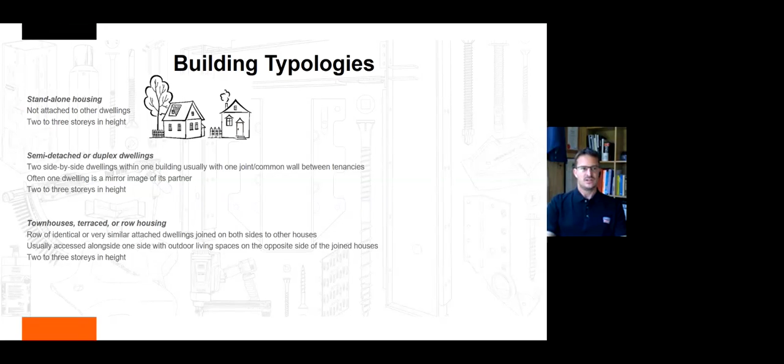So before we get into the technical side, what I wanted to cover off quickly is different building typologies. Standalone housing obviously is fairly familiar to most people and fairly self-explanatory - single detached buildings, typically 2 to 3 stories in height.

The next step from there would be semi-detached and duplex dwellings, which are sort of townhouse type, but with only a couple of buildings side by side, and these are starting to become a little bit more predominant in some of the larger urban areas and subdivisions, similar in height to standalone dwellings. And then, as I said, the townhouses, which is an extension of the duplex buildings, where we've now got a whole lot of these essentially single dwellings, standalone dwellings, but connected by one wall, one to another.

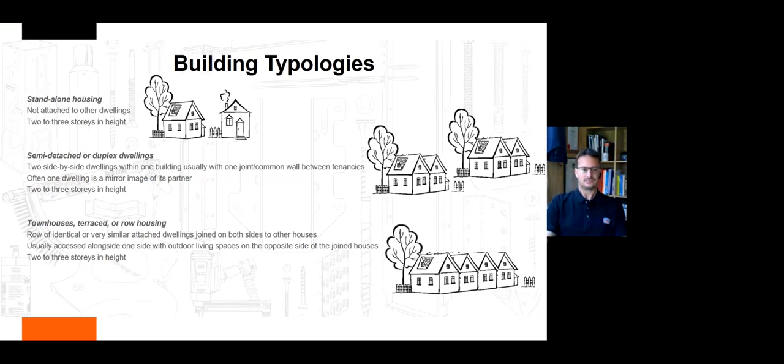From there, it really gets into bigger buildings, so apartments, and the picture's slightly confusing, but the apartments are normally self-contained units, if you want, within a larger building. So these two types of buildings in here, and then we have mid-rise and medium density.

Now, mid-rise and medium density aren't defined in any documentation or regulation that we have in New Zealand, and not very well defined overseas either. Mid-rise typically is accepted as a 3 to 6 to 8 story building in height, whereas medium density isn't necessarily so much about the height, but it's the mix of buildings. So it can be up to 3 stories or around that 3-story mark, but with multiple occupancies across the one building - similar to apartments, but in a much smaller building.

Now, why is all that important? Mid-rise and MDH obviously are starting to gain some traction in New Zealand, or we have for quite a few years now, and so we are starting to see these mixed use buildings, multi-tenancy buildings, and some of those are being built in timber rather than just steel and concrete.

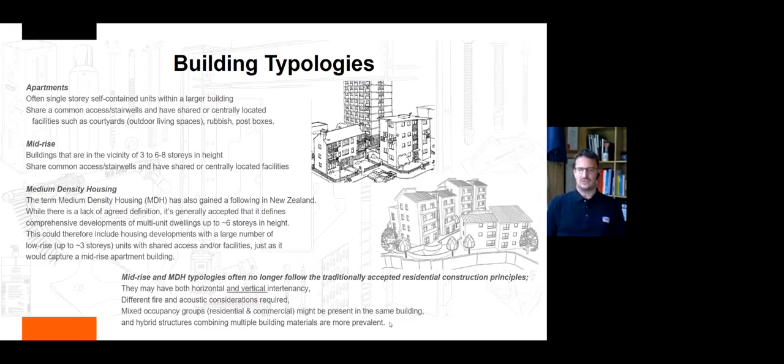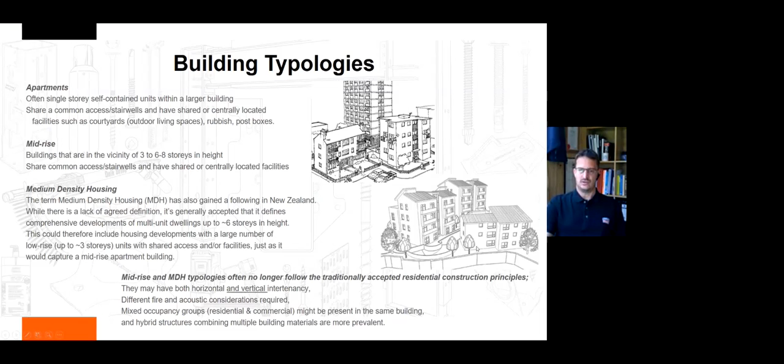Key difference here between mid-rise and MDH, or particularly the MDH, is the vertical intertenancy. So where apartments obviously are generally split floor by floor, MDH quite often has a single tenancy that runs vertically - you might have a unit that extends over 3 stories, and that is one tenancy, whereas in apartments you would normally have each tenancy across the horizontal rather than across the vertical. So you've got horizontal intertenancies, whereas with MDH you've got vertical intertenancies, but the tenancy in the vertical is the same.

So quickly on standards changes, as most of you will be well familiar now, 3603 has been up for review or under review for quite some time now. The intention was to align it more closely with 1720.1, and that has happened. So what we've ended up with is an appendix that modifies 1720.1 as the basis.

At this stage, 3603 is still acceptable to use, and there's a transition period of 1 year. So there's another year before 1720.1, or the NZS AS 1720.1, must be used. Up until then, 3603 can still be used.

3604 is currently under review. Largely corrections - there are some additions and improvements that have been scoped, and I'll talk in a little bit more detail about that in a minute. But this is obviously for standalone dwellings, or the primary focus for 3604 has been standalone dwellings, residential housing, which is now being pushed into multi-storey. And so there was a scoping exercise that was done in 2019, 2020, and that scoping defined what the review of 3604 was going to cover.

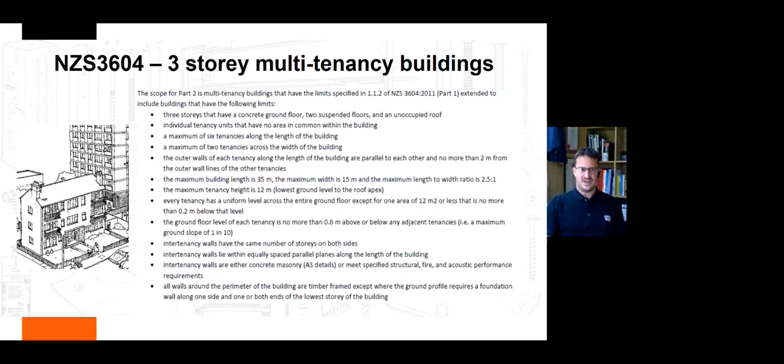Probably not much to talk about in detail. Here, as I said, the information is on the screen in terms of the limitations, but they are quite extensive - there's quite a lot of them.

So 3604 versus 3603 - most of you again will be most familiar with the fact that 3604 is an acceptable solution. Acceptable solutions are by their nature rather prescriptive, and they also have a rather restrictive scope, and that I already highlighted in terms of the 3-storey. So there'd be a whole lot of limitations around where 3604 can be used for multi-residential design, MDH design, and the approach obviously is very prescriptive.

Compare that to 3603, which is the timber engineering design standard, so specific engineering design, and as I've already talked about, 3603 is really out of date, in that it has now been - not replaced, because you've got this overlap transition period - but it's essentially being replaced by NZS AS 1720.1. A big part of that makes sense, because for larger timber buildings, whether it's commercial, industrial, or multi-residential, 3603 doesn't really capture the design methodology that is best practice, or that's used by engineers already, and it doesn't align with current products, particularly for larger timber buildings.

So NZS AS 1720.1 uses 1720.1 as the basis, and then modifies that, so there's a simplified and a detailed design method. The simplified method is essentially 1720.1, and then the detailed design method provides more information, particularly around fasteners, for design of larger timber buildings, and that uses the European Yield Model, the EYM.

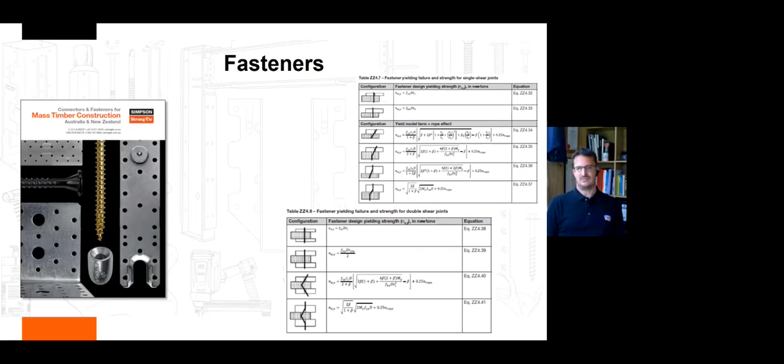You get different failure mechanisms, or potential failure mechanisms, depending on your design parameters, spacings, etc., screw diameters, timber properties, all those sort of things. You get potentially different failure mechanisms, and so you work through calculating or checking each of those failure mechanisms, and obviously the lowest one will be your governing design, and give you the strength for your joint.

Now, what's important here to just highlight too is the fasteners and material properties for those fasteners. Obviously, the fasteners will need different material properties to plug into these calculations to what we've seen in the past in 3603. One of the things that the committee had a look at, and this is a learning from our concrete standard 3101, where there's an inclusion as an actual clause that says the mechanical and chemical anchors used in concrete must have European technical approvals. So that does limit or restrict certain products in the New Zealand market where they aren't supplied out of Europe and therefore haven't got European technical approvals.

This information around material properties for fasteners in the timber standard was quite specifically added as a commentary clause, so that it doesn't exclude screws or suppliers that aren't from Europe, but nonetheless it draws attention to the fact that you need to have these design parameters, and they should really be stated in declarations of performance or European technical approvals. It shows what the different material properties are that you need for fasteners.

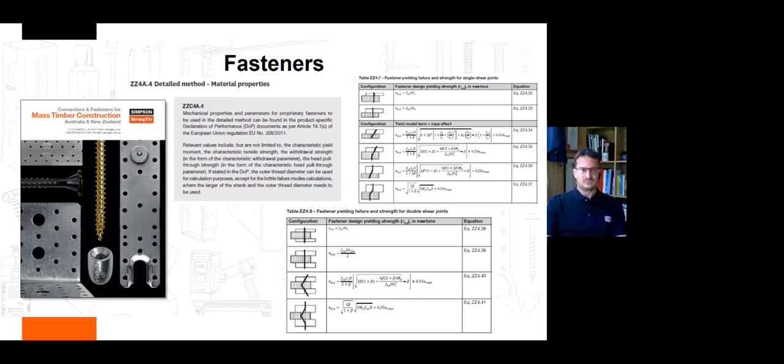So connectors then, as per 3603 or the new NZS AS1720.1, and this is where it gets a little bit more complicated. Fasteners, as I said, are fairly straightforward because we've got the detailed design method or quite prescriptive approaches in terms of 3603, in terms of screw diameters and spacing. When it comes to connectors, it gets a little bit more complicated.

3603 already had a clause in the back, an appendix that talked about AS1649, an Australian standard that looks at testing connectors and coming up with characteristic capacities. There were some minor modifications made in 3603. NZS AS1720.1 now refers directly back to AS1649.

What AS1649 does is look at an LPL, or lower, as it says in brackets, a fifth percentile value of your test data. So you run a number of tests on the same connector. You determine a load capacity from that as a fifth percentile value with 75% confidence. You then have a look at working out your ULL, or unit lateral load, which is as per the two formulas on the screen here. One's a fifth percentile and the other one's an average load.

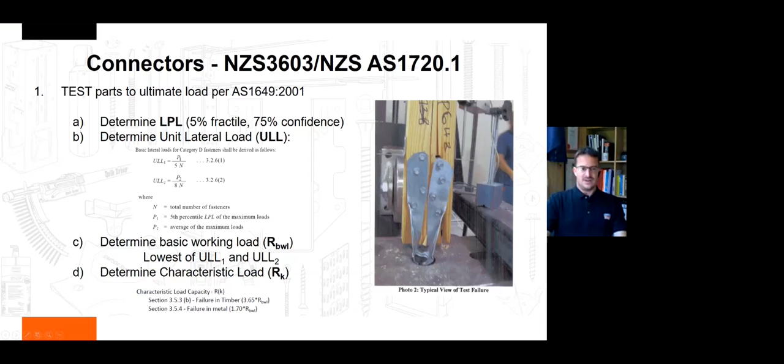So this is the LPL. From that, you take your basic working load, which is the lower of these two numbers you've calculated. Then you look at your failure, whether it's a failure in timber or a failure in metal, and these are two different factors that you use to multiply your basic working load to get a characteristic load.

What we do as Simpson Strong-Tie is then have a second and third look at these test results, or at the capacities we've arrived at. The first one we add is essentially serviceability load, deflection governed. So we take the test results and look at a joint slip limit, typically 3.2 millimeters, unless it's for hold-down connectors where we allow up to 6.4, because those are generally larger connectors than your general connectors, joist hangers, etc., and where joint slip is a little tighter because of the thinner material.

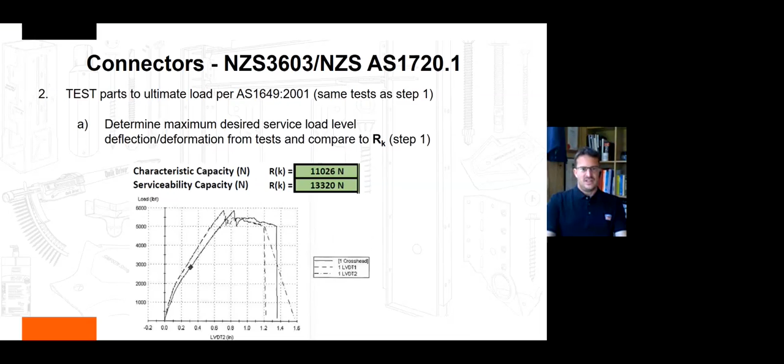So the third part then is theoretical calculation. We run through and calculate the actual capacity of the fastener, so the screws or nails into the timber, and make sure that if that governs, we limit the capacity based on the calculations.

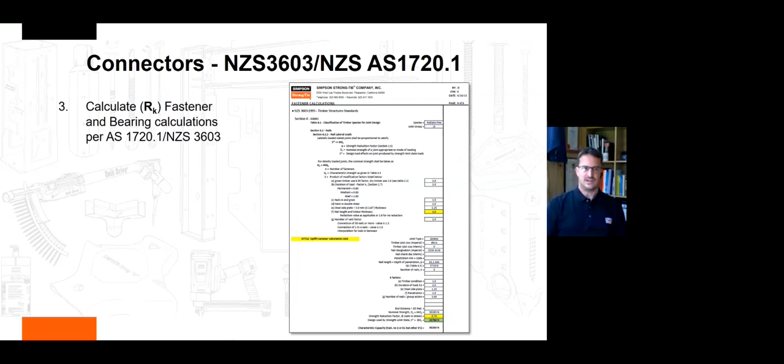So what you get, as I said, is three different results. The first is your AS1649 characteristic capacity. The second is a serviceability aspect, and the third is the actual calculation check run over the top, and the lowest will obviously govern.

So you'll find that for the DTT2, shown in the picture here, we published a capacity of 7.7 kilonewtons. That's the design capacity, so it's already got the phi factor and the load duration factor built into it. We're looking at uplift here, so a load duration factor of 1. So that 11.03 kilonewtons times 0.7 times 1 is 7.7, which is what you find in our literature. That's if you went through and did it as per 3603 or as per 1720.1.

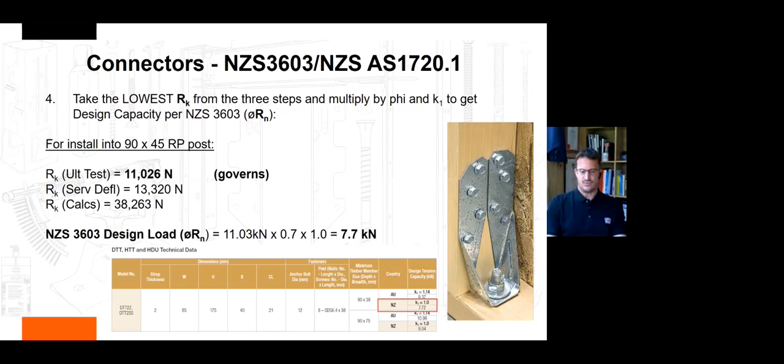If we now have a look at 3604, clause 2.4.7 talks about a connector capacity, and within that it refers to BRANZ EM1. So the actual design capacity here has a characteristic value, and that characteristic value is obtained by testing in accordance with BRANZ evaluation method EM1.

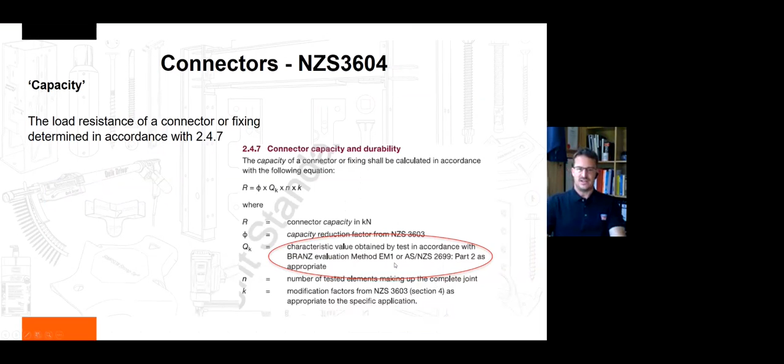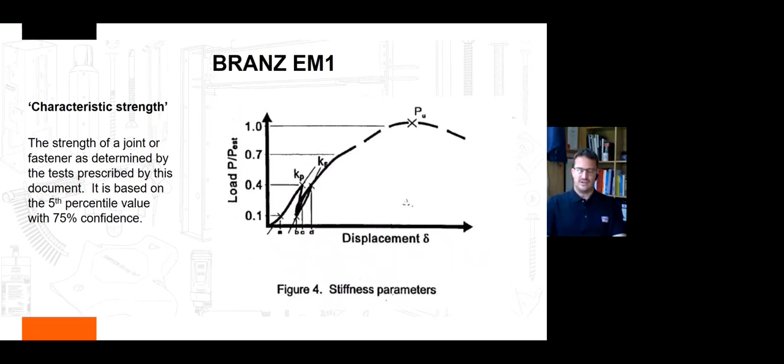So what does EM1 look like? EM1 is essentially our LPL, our initial test data, 5th percentile with 75% confidence. So we take our test results and simply analyze them to come up with a lower probable load, above which we know that 95% of results should sit. And when we take again that DTT2 and analyze that data as simple calculations, we get a characteristic load of 17.3 kilonewtons as BRANZ EM1 calculated.

That, as I said, is very similar to the LPL that we use in AS 1649, but is obviously very different to the characteristic load that we get out of AS 3603 by the time we've applied the other factors to it, the ULL, and applied the design working load reduction factor based on the failure mechanism.

So this LPL is simply test data. The AS 3603 characteristic load, for the numbers that we publish, as Simpson publishes, could also be limited by the joint slip or the theoretical calculations rather than just AS 1649.

That gives you an idea of the difference between the actual characteristic capacities, depending on whether you've calculated them based on AS 3604, i.e. BRANZ EM1, or based on AS 3603, i.e. AS 1649. Hence in our tables, in our 3604 catalogue, we publish a capacity for the DTT2 of 17.3 kilonewtons, which is quite different to 7.7.

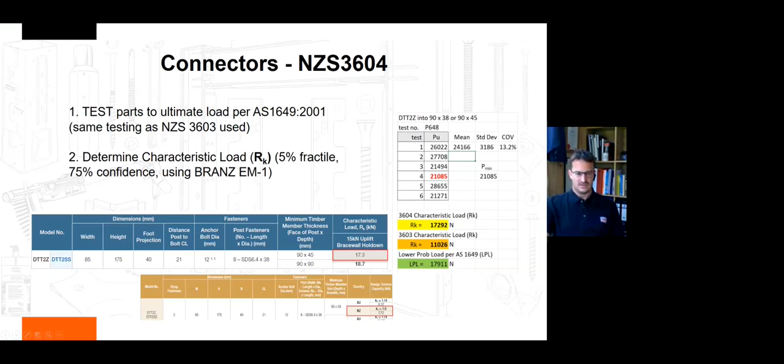Granted this is characteristic, so it still needs the variability factor applied. So what that means is that AS 3604 characteristic capacities aren't equal to AS 3603 characteristic capacities. It's not just the additional joint slip limit or theoretical calculations that Simpson applies over the top, but even just comparing BRANZ EM-1 to AS 1649, you get different characteristic capacities.

Therefore you should really be using specifically developed data that's assessed as per AS 1649 for anything designed to AS 3603 or NZS/AS 1720.1, and information analysed as per BRANZ EM-1 is really only applicable to AS 3604 type structures, so anything within the general scope of building within 3604.

A second note: same sort of thing. If you take the 3604 characteristic capacities, something analysed as per BRANZ EM-1, and you apply your phi and K1 factor, you're not going to get the same result as if you'd done an analysis as per AS 1649.

Particularly for us as Simpson, you won't have the serviceability aspect or the theoretical calculations applied for the capacities that are in our 3604 catalogue.

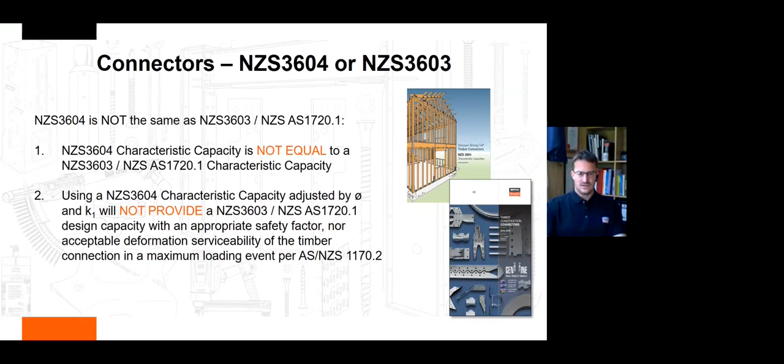So just a quick recap: the numbers that we've calculated, or the capacities that we publish in our 3604 characteristic catalogue, are only applicable to 3604 type buildings.

What are these buildings? This is only a high level summary, but importance level 1 and 2 buildings, currently height of 10 metres, 3 storeys only if it's 2-storey with a part storey in the roof, so not a full 3-storey plus roof, and floor area not exceeding 250 square metres for 3-storey construction.

As we've already said, this is currently under review, and there will be some additional scope for 3-storey which will expand on that slightly, but nonetheless it won't cover a lot of the 3-storey designs that we are seeing being designed and built in timber, concrete or steel at the moment.

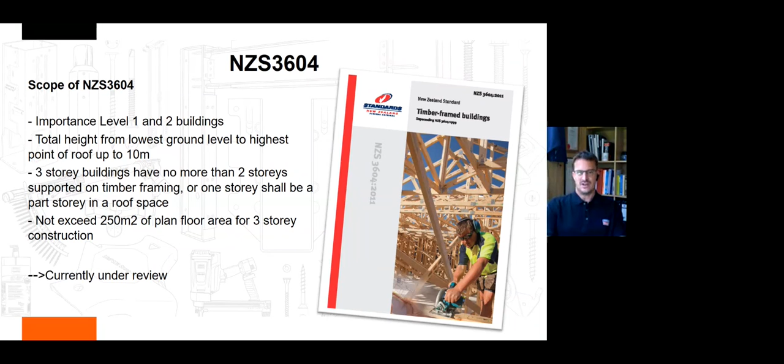So that's the first part of the presentation, focusing on the difference between 3604 and 3603 in terms of determining characteristic capacity and why it's important to use the correct numbers. The next part I want to look at is bracing.

3604 type structures, so light timber frame buildings that we're well familiar with in residential design, obviously use framing, light timber framing with some sort of sheathing on it, whether that's plasterboard, plywood, or any other sheathing that gets fixed to the framing behind it to provide lateral restraint to our buildings.

The elements within that bracing panel are obviously the framing behind it, the sheathing on top, then fasteners that tie the sheathing back to the framing, a compression stud that bears down onto your foundation, and at the other end a hold-down connector to take care of the tensile load in your brace panel, tying it down into the foundation.

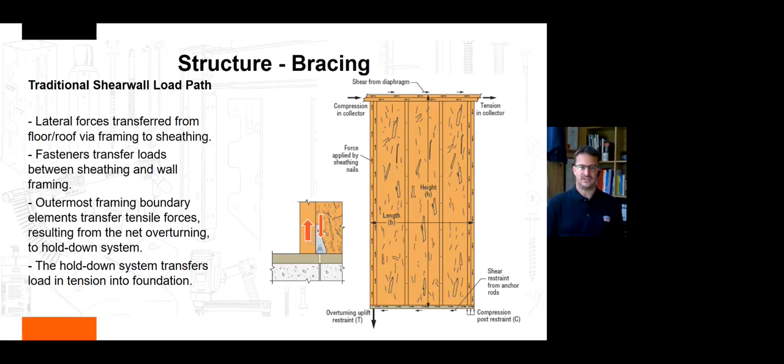Now 3604, similar to what we talked about with the connectors, and a lot of the products in the market that have been traditionally designed as hold-down connectors for these brace panels, don't really give consideration to any stiffness or movement in that panel, but simply look at the actual load capacity, the strength aspect, but not necessarily the stiffness.

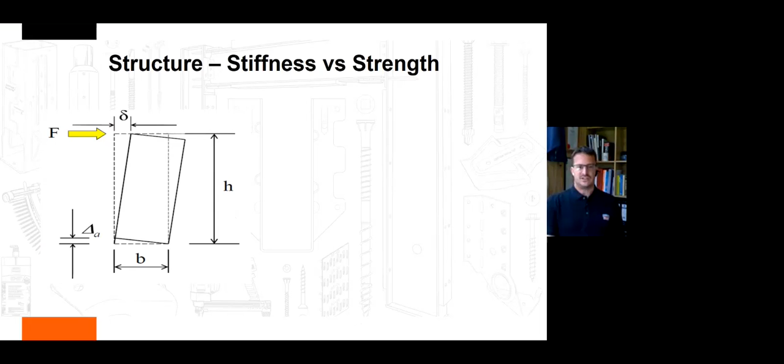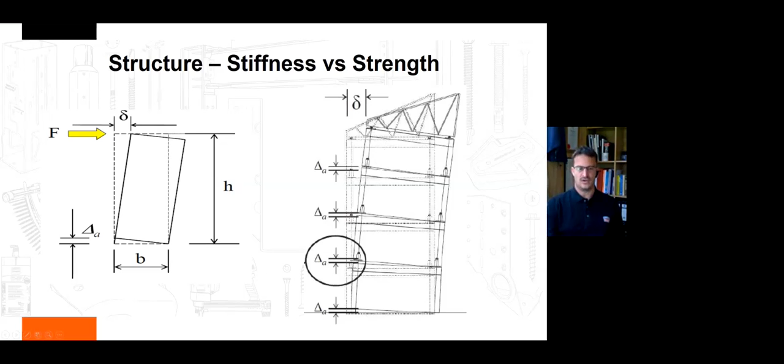When we translate that design method or construction method into multi-storey, we want to be looking at stiffness as well as strength. Multiplying each of these brace panels over several levels, we get a certain amount of movement due to the stiffness of the connector and the panel. We're primarily looking at the connector here, because that's what the talk focuses on. That movement or deflection of the connector on the brace panel has an impact on the rotation of the panel, and in multi-storey design, because you accumulate each of these deflections, you end up with an overall building movement that can be quite considerable. NZS 3604 doesn't really deal with that because it only covers single storey or up to two-storey buildings.

The primary aspects that 3604 looks at when it comes to bracing is distortion of the building, so the stiffness of the panel itself, to make sure we get a building that remains rigid enough and doesn't start to lean over, but that has not a huge impact on the hold down connector. Then we have fixings at the bottom of our building to make sure the entire building doesn't slide along. These aren't necessarily part of the bracing panel, but are hold down bolts and bottom plate fixings that normally tie our building back down onto the foundation to stop it sliding along.

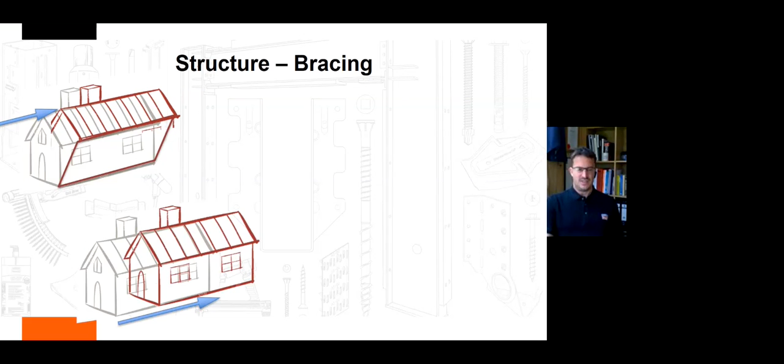Both of these aspects do apply in MDH buildings too, three storey plus, but there are other aspects that come into play when you get into taller buildings, and one of those is overturning of the actual building. What's shown here is a bit extreme, a very tall tower, but nonetheless the overturning needs to be considered. As I've touched on, there are elements of brace panel deformation and movement, the stiffness and flexure of these brace panels at each floor level, that when accumulated over several storeys have quite a different effect on the building than what is acceptable in a 3604 type structure.

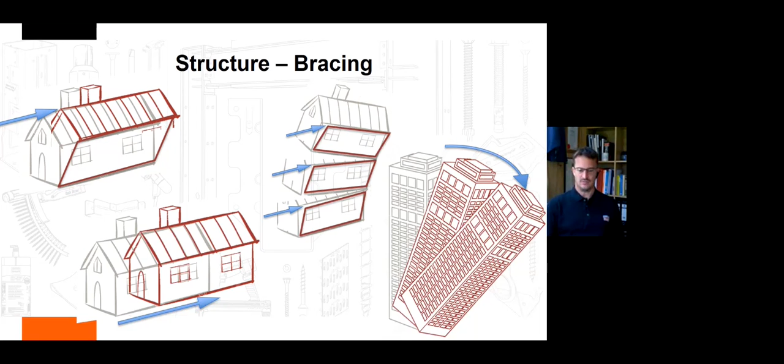So when it comes to MDH or mid-rise, light timber frame is still an option in terms of designing, and I'll talk about the different mass timber and other timber options at the end of the presentation. Light timber frame is a cost-effective solution here. The biggest area we need to consider is stiffness as well as strength.

When it comes to hold down connectors, which you can potentially still use because there are connectors on the market - Simpson has some heavy duty connectors, as do others - you need to look at the actual stiffness of that connector as well as the strength, so that you get your overall building stiffness and flexure design correct.

The other option is to use an anchor tie down system, essentially the same principle as traditional hold down panels, which have been talked about for quite some time in the New Zealand market too. I talked about anchor tie down systems about three years ago at a TDS roadshow in greater detail, but the concept in terms of the brace panel remains the same.

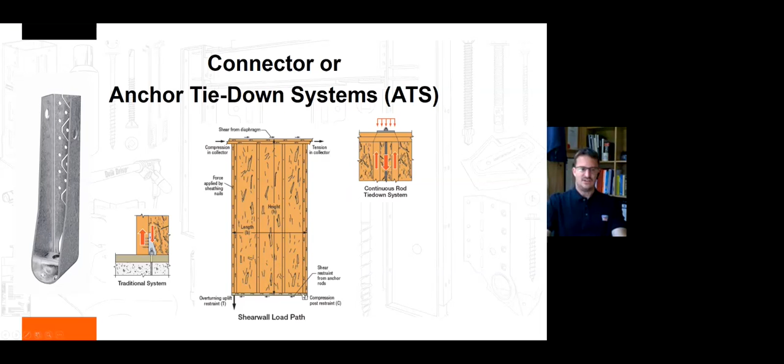You've got light timber framing, with sheathing across the top that has fasteners to tie the sheathing back into your wall framing. You still have a compression end of your panel and a tension end, but instead of having this hold down connector that sits in the bottom corner of the brace panel, we now run a rod up the length of the panel and provide a tie off at the top plate level.

So you've got a steel rod that runs up your brace panel until it gets to the top plate level, where you've then got a washer and a take-up device, or tie off, to grab the top of the panel. As that panel wants to lift up, it pushes against the framing, pushes against the bearing plate, which pushes against the nut or take-up device, and stops that panel from rotating up, transferring that load into tension.

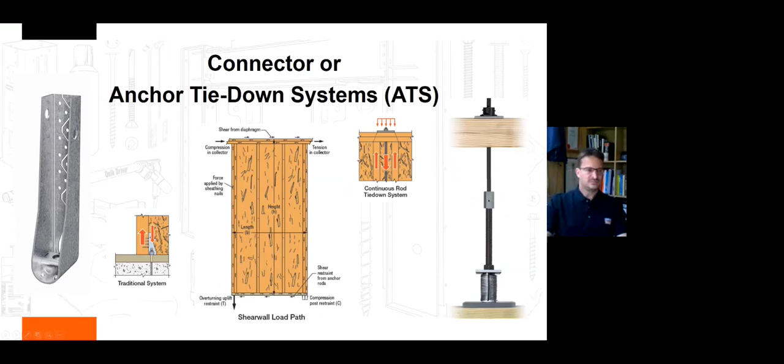That rod is connected into our foundation to pick up the tensile load. If we do that over multiple levels, the steel rod runs continuous over each of these levels. Going back to the previous picture, you'll see we've got these couplers. So while we talk about a continuous rod, obviously it isn't full length over multiple stories, but these couplers allow you to join one rod to another, and potentially a larger rod to a smaller rod. Over several stories, we have this continuous steel rod running up, and at each floor level, at each top plate level, we'd tie off to provide the tensile or tension hold down for that brace panel below it.

In reality, because it's quite hard to get take-up devices and the tie-off happening at top plate level, since that sits within the mid-floor, we actually do it at bottom plate level of the next story up. This is where people get confused, because you've now got a tie-off at bottom plate level here, but it's not for this brace panel below it. So it's not like our traditional hold down connector, just because it sits at bottom plate level, that it's for this panel. The tie-off is actually for the brace panel below it. Your next level would have a tie-off at the bottom plate level of the next story up, and once you get to the top of the building, you have a tie-off at the actual top plate level.

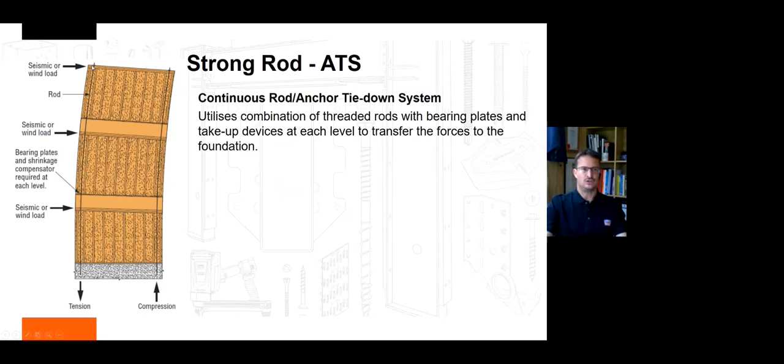As far as the design is concerned, the method is exactly the same. Your tensile load comes down through the steel rod, and you've got studs that act as your compression stud pack. What's important here is that the lever arm between tension and compression changes, because as you go down the building, your loads accumulate, giving larger tensile and compressive loads. So you end up with a reasonable number of studs to transfer your compression load, and the center of your stud pack provides the distance to the center of your rod, as far as the lever arm between tension and compression is concerned. So be careful when designing these that your compression isn't measured to the center of the rod, it's the center of your stud pack.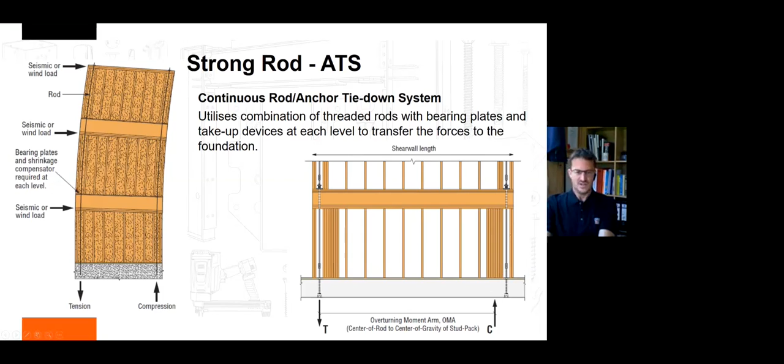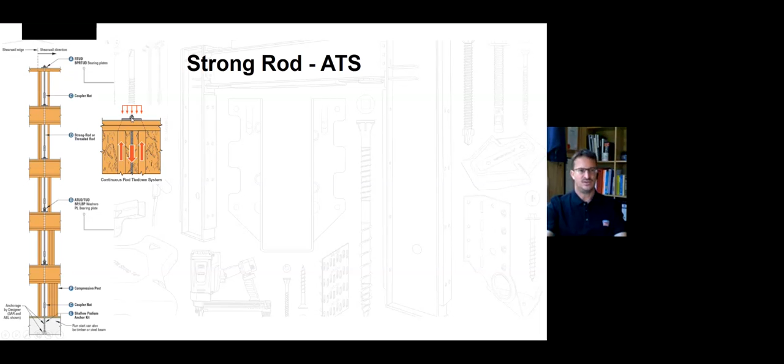So when it comes to tie-off, you've got this continuous rod running up the building. In theory, we're tying off at top plate level, but in reality, we're tying off at the bottom plate level of the next level up, because it's a lot easier to get the components in there. If we put a bearing plate or washer with a nut over the top, as the building settles and we get shrinkage over each level -- particularly towards the top, because you get accumulation of shrinkage from each level, so the top of the building settles a lot more than the bottom -- we'd end up with a gap developing between the nut and the bearing plate. So there are take-up devices we put in to deal with that settlement.

We have two different take-up devices. One is a ratcheting take-up device. This is a cut nut insert, a threaded insert in four sections with a spring around the outside, that grabs the rod as it comes through. It has little lugs screwed through our bearing plate, because the load pushes up against the bearing plate, pushing up against the take-up device, which then grabs the rod. This holds tight against the rod so it can't pull through in the downward direction, allowing it to pick up the tensile load, but it can still push through in the upward direction.

The spring around the outside allows the threads on the rod to click through in an upwards direction, so that as the building settles and the framing moves downwards, the device, held screwed to the top plate, simply ratchets along, allowing the rod to travel upwards. Any shrinkage that happens is removed because the device ratchets down along the rod.

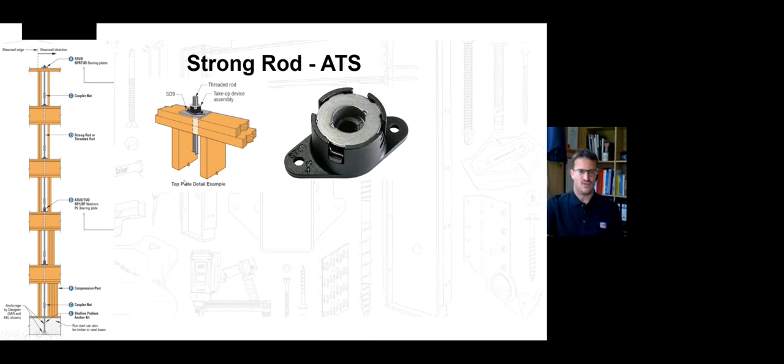Now, the other take-up device that we have, and the one we suggest people use in the lower stories due to its failure mechanism, is what I call the screw jack type device.

These are two tubes. This one's turned upside down because it's a little easier to see, but it's the same device, just looking at the bottom. You can see an inner tube and an outer tube. The outer tube has a thread on the inside, the inner tube has a thread on the outside, and you've got a spring around the outside, which is a torsional spring.

When you pull this activation pin out, that allows the spring to unwind the inner tube from the outer tube. As it unwinds, because of the threads, it extends and fills the gap. So quite different to the ratcheting take-up devices, and you now have a bearing plate with a washer over the top, with this take-up device between it.

Once you pull the pin out, if the building settles, the framing moves down, and the torsional spring wound around the device would cause that device to unscrew.

The failure mechanism of these is quite different because you've got the rod running through the middle of it. The rod's in tension, the actual device is in compression because it sits between the bearing plate and the washer over the top. But because the rod runs through the middle in tension, that restrains it so it can't buckle, and you've got much coarser threads on here.

So the failure mechanism of these is much more ductile, whereas the failure mechanism in your ratcheting take-up devices is a lot more brittle or instantaneous, because once you've damaged the threads, you're going to lose your load carrying ability altogether. Whereas this is going to take a lot more to deform those threads.

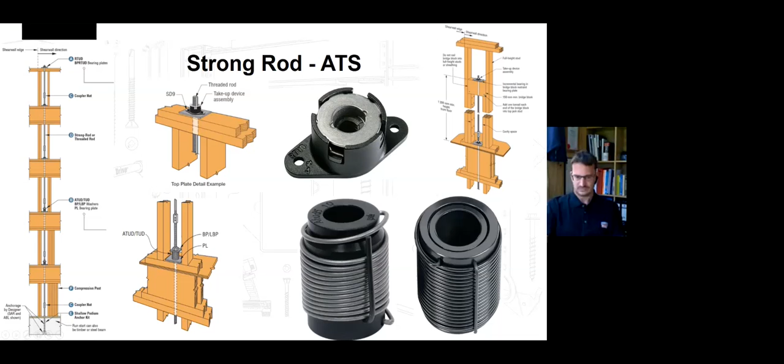Now there's a little video here that's available on YouTube too, and I'll play that quickly. This is from a test that was done in 2009 with the strong rod system in Japan on a shake table.

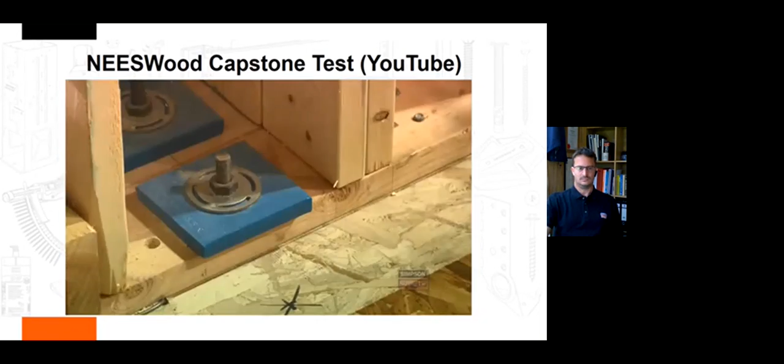I'll stop it here, sorry, because the video seems to have a little bit of a twitch on it.

But as I said, the video is available on YouTube—search for NEESWood, and you'll find it there too. This was done in 2009, as I said at the start, so this isn't really new technology. Globally, the anchor tie-down systems have been used quite widely, and we have a much better understanding of the design principles behind it, and we've refined the system from what it was back in 2009. So this isn't really new—it is a reasonably new addition to New Zealand, but it does enable light timber frame to be used in these multi-storey buildings. Overseas it's not just 3 to 6 storeys, but up to 8 storeys, where we're seeing these anchor tie-down systems.

That leads me on to the next thing, which is really the effective use of timber. So obviously this is for light timber frame, which uses stress graded structural timber, exactly the same as what we do in 3604.

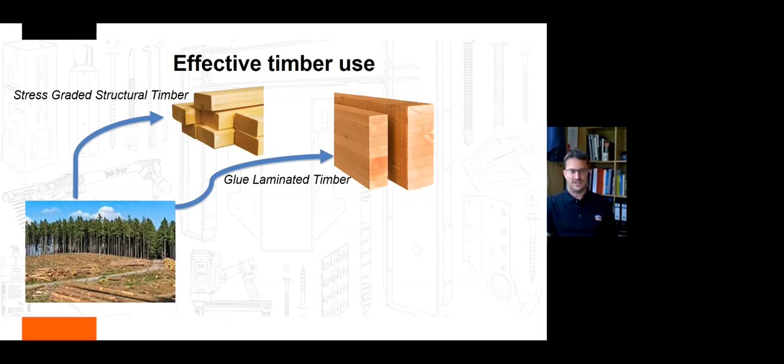We can turn timber into other materials, as I'm pretty sure most of you are well familiar with. There's glue laminated timber, cross laminated timber, and laminated veneer lumber, among a few others, but those are the primary structural timber materials readily available in the New Zealand market.

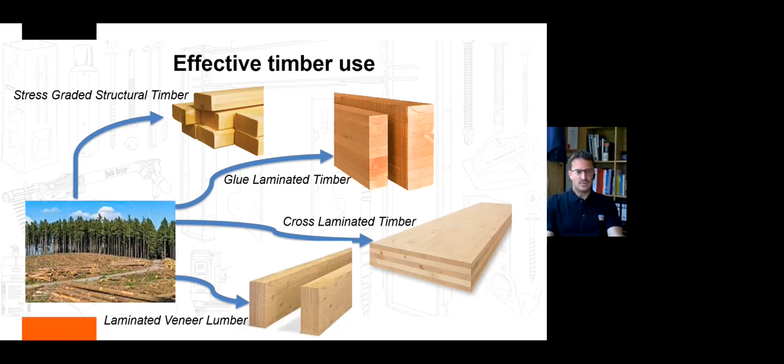So why do I want to talk about that? Well, those different materials, as you go from stress graded, to glue lam, cross lam, and LVL, end up with much greater strength and stiffness in that panel. Some of the strength is a natural byproduct of the randomizing of defects, while the stiffness is an impact of the actual engineering that goes into it.

As we go from sawn timber that's stress graded, to glue lam, then onto CLT and LVL, there's much greater processing required at each step, because we're separating the timber fibre a lot more and then reconstituting it to give us the material properties and sizes that we want. And that's where the stiffness really comes from.

Because we can select different veneers when it comes to glue lam, cross laminated timber, and laminated veneer lumber, we can impact the stiffness. The strength is almost a byproduct of the randomizing of defects, which has a large impact on strength. As we go through those materials, the material properties also become a lot more consistent.

The spread of material properties becomes a lot more consistent, so you get much more uniform performance out of LVL because it's selective veneers glued together, similar with CLT and glue lam.

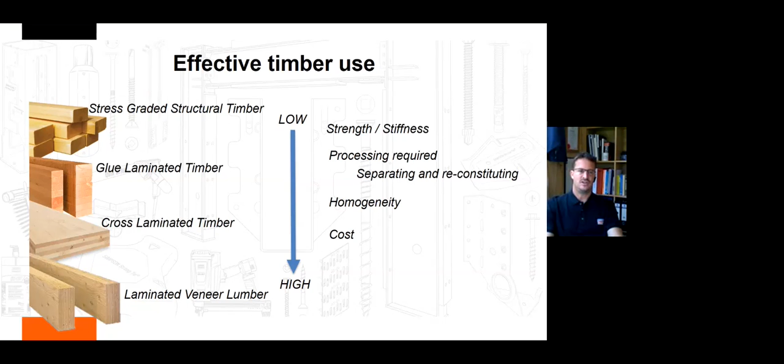The downside of that is cost. Light timber frame, if we take a stick of timber, is much cheaper because there's less processing that goes into it than the cost of CLT or LVL. But there are limitations when it comes to light timber frame and the material properties.

I wanted to throw this in because I think it's important for us as engineers to remember what the benefits really are of different materials, and using them effectively so that the end user, whether the actual occupier or the developer, gets best bang for buck with their timber building. That's the only way we're going to encourage much greater uptake of timber in these mid-rise buildings than the steel or concrete we're currently seeing.

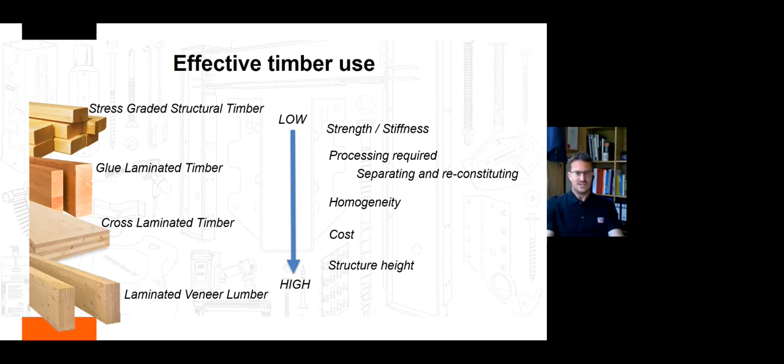Skipping through a couple of quick examples of buildings that have been built: Stonefields in Auckland has a couple of big blocks, 3-storey, that were one of the first buildings in New Zealand with the rod system in it, going back quite a few years now.

Mary Potter has been talked about quite a bit over the past years. Again, this was designed with a Simpson Strong-Rod anchor tie-down system, and there's been plenty of talk around that. Now we're seeing a bit more evolution of this, and Kāinga Ora is a good example of using the right material in the right applications.

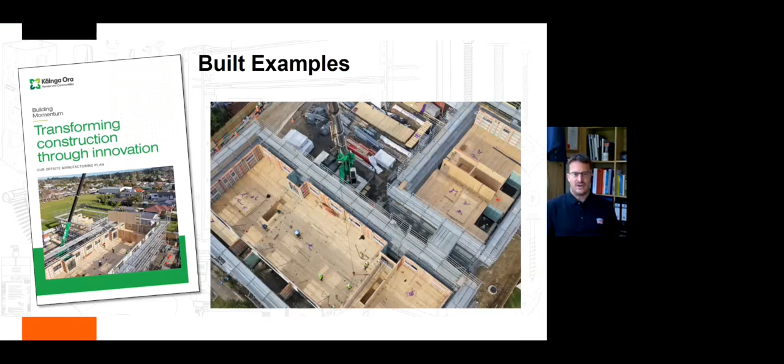This is CLT - we've done a few designs now with engineers using our system where they've used CLT for the stairwells and CLT floors, then used light timber frame with the anchor tie-down system for bracing on each floor level. Even the system itself has had a little bit of refinement by the engineers that have used it.

This is a couple of pictures from the Kāinga Ora project, but we do, as in Simpson, provide cast-in anchors or threaded rods with washers attached to them that get cast into the concrete.

The difficulty, and this was one of the learnings from the early Stonefields project, was that this rod really needs to be perfectly placed, because it ends up sitting between studs and a wall plate. The bearing plate that sits over the top of it at the next level up has to fit between the two studs. So in this orientation, the rod needs to be fairly accurate, and out of plane it also needs to be fairly accurate, because if the bearing plate sits over the top and that rod isn't centered, the bearing plate would either clash with the interior lining or the exterior wall cladding. So placement of these cast-in anchors is quite critical.

To avoid potential issues when they aren't exactly right, a common detail now is to have a steel plate with steel attached to the bottom that gets cast into the concrete, and to that steel plate we weld a steel starter block. These starter blocks normally allow you to connect a rod to steel beams. The starter block gets welded onto the cast-in plate, which is a lot easier to get exactly right, because at that stage the concrete's done, we know where the edges are, and we can measure out exactly where that steel block goes, so the rod sits nice and centered in both orientations.

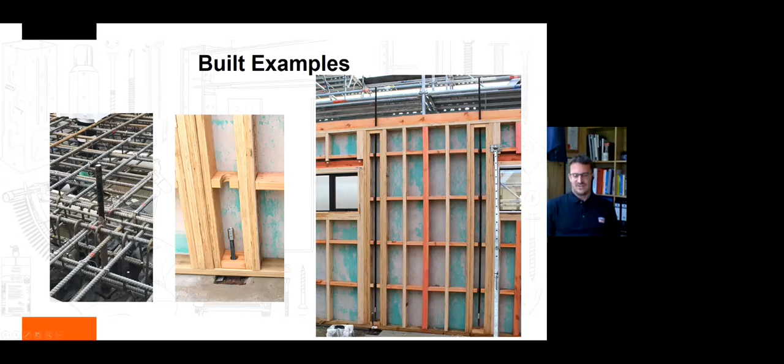So why wood? We've talked a fair bit about 3604 and 3603 in this presentation. Timber has a lot of benefits in terms of sustainability and in terms of what we're used to for residential construction, our level 1 building importance, level 1 and 2 buildings. We're seeing an interest in progressing that into multi-storey design, both in terms of the update to 3604, but also developers, engineers, and end users wanting multi-storey designs done in timber, whether it's timber frame, CLT, or any other mass timber type design, but nonetheless it's wood.

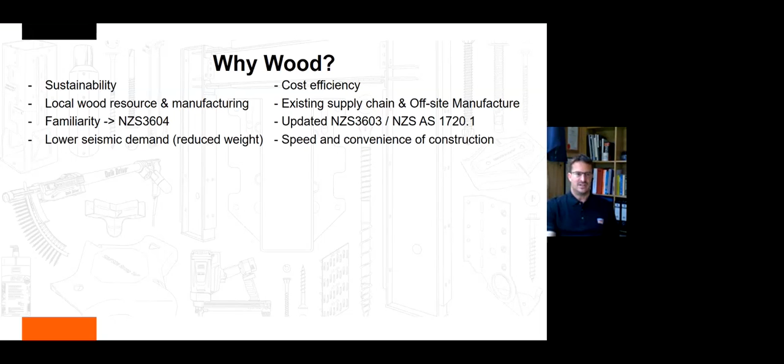One of the key things to remember, and that was really the point of the presentation today, is that just because 3604 has a light timber frame, and we're now moving into larger timber buildings, multi-storey design with light timber frame, they should be designed to 3603 rather than using the 3604 method. That's connector design, as I talked about, in terms of using the right characteristic capacities or the right design capacity information for your joints.

Also looking at bracing, making sure that we actually get our bracing right, and we consider stiffness, not just the strength, so not just plugging standard bracing designs into 3+ storey buildings, and using timber or different engineered wood products in their right application to actually come up with a cost-effective solution for the end user, and that will hopefully help encourage much greater uptake of these timber buildings.

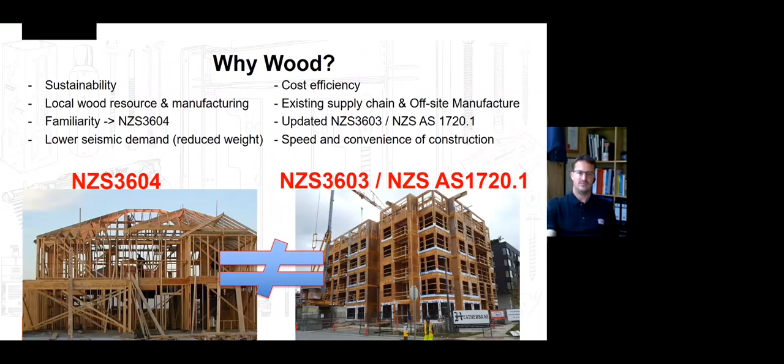Thank you very much, Daniel. That was really very thorough and informative to set the differences between the connectors according to 3603 and 3604 and the characteristic strengths calculations. That's really very good information to learn, and also to describe bracing, holding down bolts and connectors. That's also very good information to learn about.